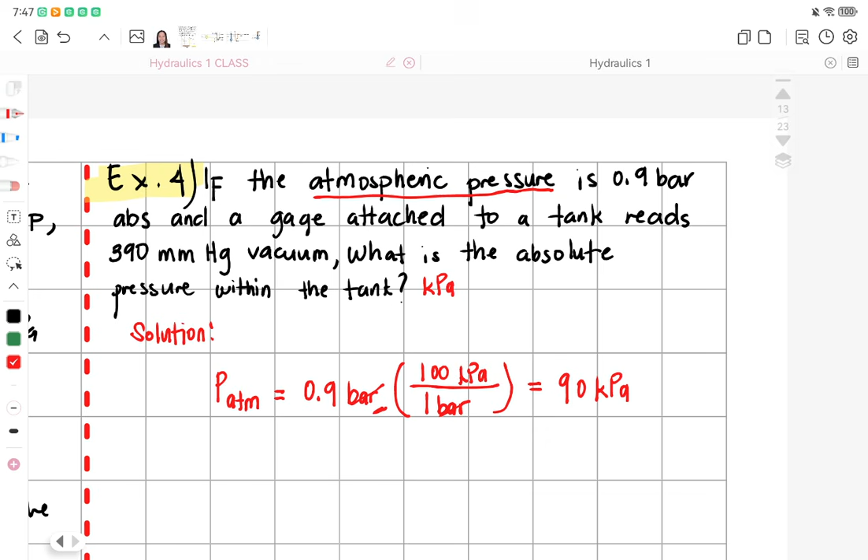What is being asked here is the absolute pressure, and we know that the formula for our absolute pressure is equal to our P gauge plus the P atmospheric.

So now we have P atmospheric equal to 90 kPa. What's left is to get our P gauge. For our P gauge, based on the problem, the gauge attached reads 390 mm height of mercury, and it is vacuum, vacuum pressure.

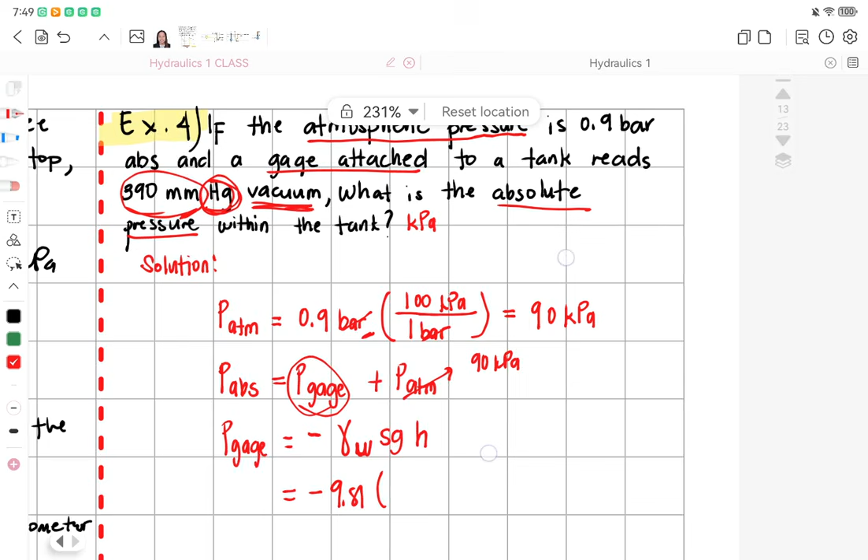So if we say vacuum pressure, our P gauge should be negative, right? Negative. And we know that the formula for P gauge is unit weight of liquid times the SG times the height, so 9.81, and we know that the unit weight of mercury has SG of 13.6.

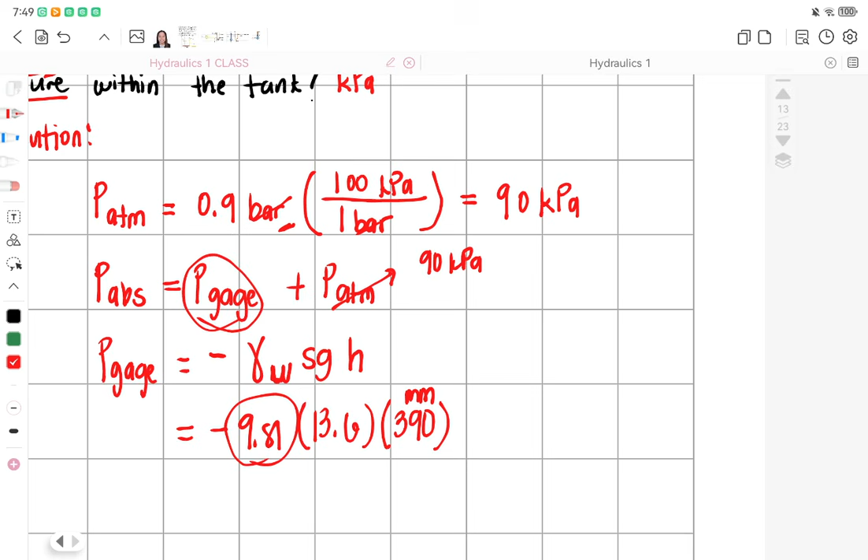So 13.6, and then given the height of the mercury which is 390 mm. Since this is in mm and this is in meters, and our kPa is kilonewton per m squared, we have to convert mm to meters. To convert that, we have 1000 mm is equal to 1 meter.

So now, what is our P gauge? We have negative 52.032 kPa for our P gauge. Since what is stated here is vacuum, we have a negative P gauge.

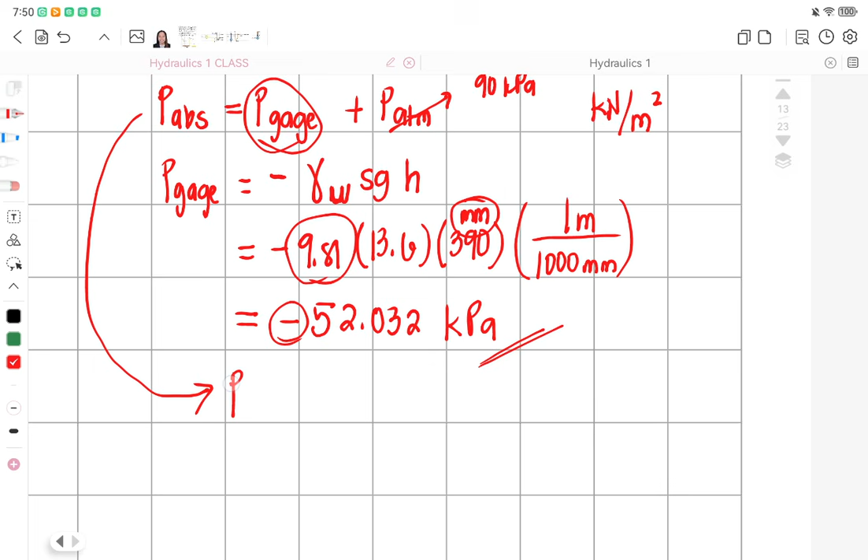Now we have to substitute all the values to get our absolute pressure. So P gauge negative 52.032 plus 90. If the P gauge is negative, you have to carry the sign. So therefore our P absolute is equal to 37.968 kPa. So this is our final answer.

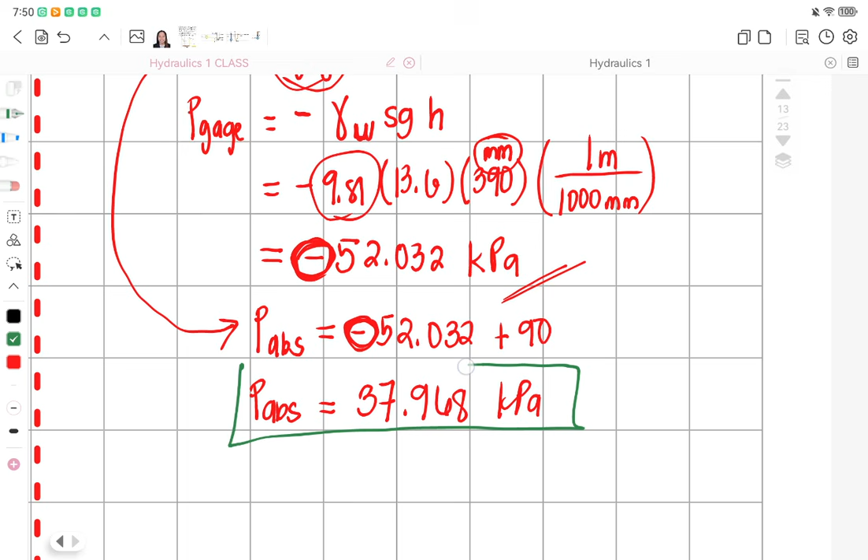Okay, now let's proceed to our problem number 2. For the setup shown, calculate the absolute pressure at A. Assume that the standard atmospheric pressure is 101.3.

So it is stated that the P atmospheric is 101.3, so we will be using this value. For our solution, what is being asked is the P absolute at A, which is equal to P gauge plus P atmospheric, and our atmospheric is 101.3 kPa. So what's left is to solve for the P gauge.

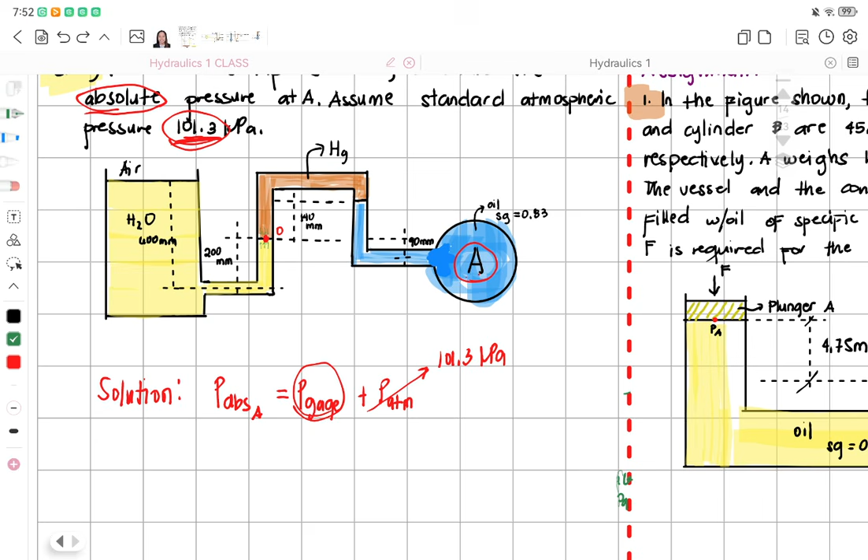If we want to get the P gauge, we can start either at this part, the earlier part, or this part here. Let's try starting at this part here. So if we start here, we have P gauge at A, or let's just say PA.

If we say gauge pressure, that means the pressure inside the container or the tube. Then the atmospheric is the pressure outside the container or the tube. So to make it easier to understand, let's start here. So we have PA, and we will not be considering this distance since it is horizontal.

So we only consider the vertical, this 90 mm. Since it goes up, we have minus 9.81 times the SG 0.83 times the height 0.09.

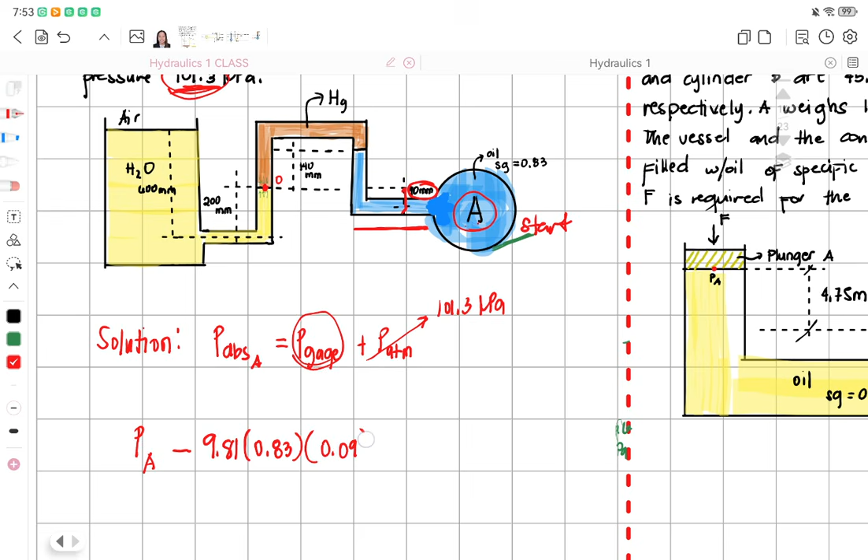So let's convert this to meters since it's in meters. So it goes up, so next is this one, still minus because it goes up, times the same liquid 0.83, times the height 0.14, since it's 140.

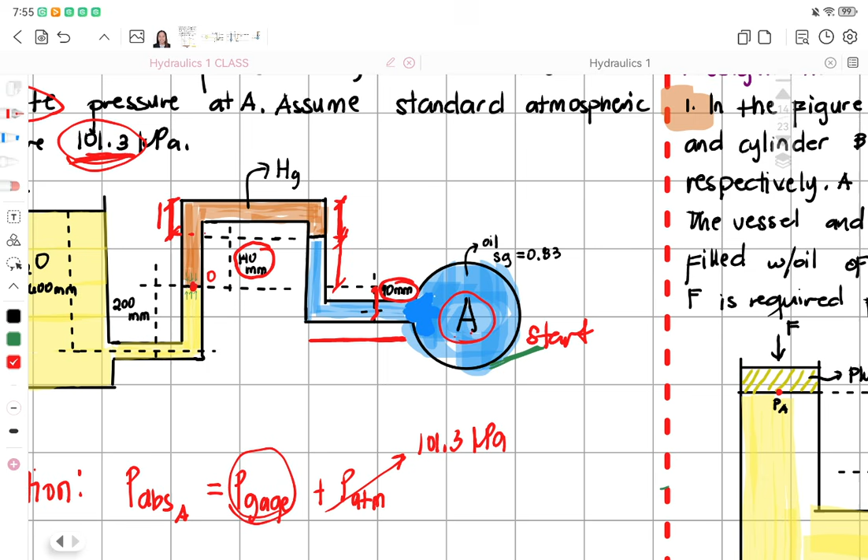Next, since this part is vertical going up, and we know this part is also vertical going down — and of course, the same elevation with the same liquid is equal to the same pressure. Since it goes up, it's minus, then it goes down so it's plus the same pressure, so they cancel out. So we don't need to apply this part and this part to the solution, and we also don't consider the horizontal part. So we go directly to this part.

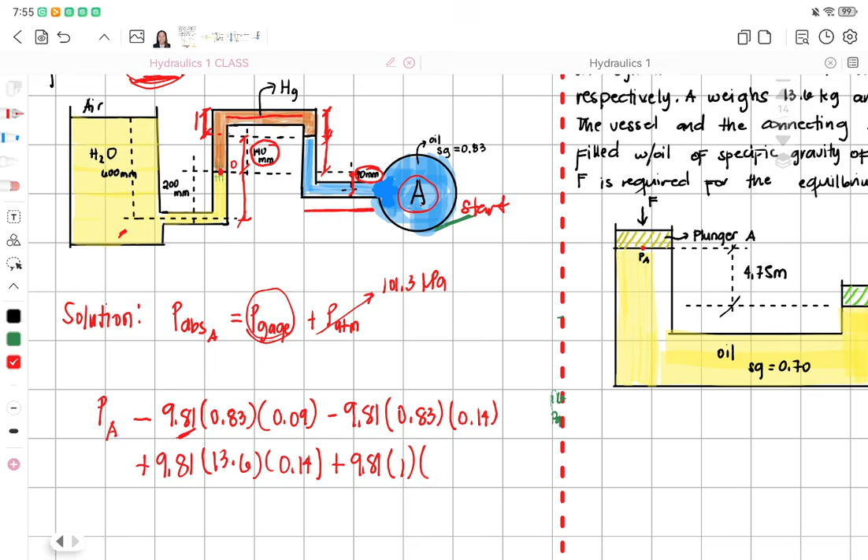Since it goes down, we have plus 9.81 times Hg, so 13.6 times the height, 0.14. Next, this part, plus 9.81 times 1, kay water naman, times the height, 0.2. Plus, ay minus na, kay gapasaka naman ta, minus 9.81 times 1 times 0.6 is equal to, unsa maning last?

This is open, then air, so 0. So this is our equation if we start here. If we calculate this one, your answer is negative 12.88 kPa.

Okay, sige, let's calculate if this is correct. You should try, ha? So yes, that is negative 12.88 kPa.

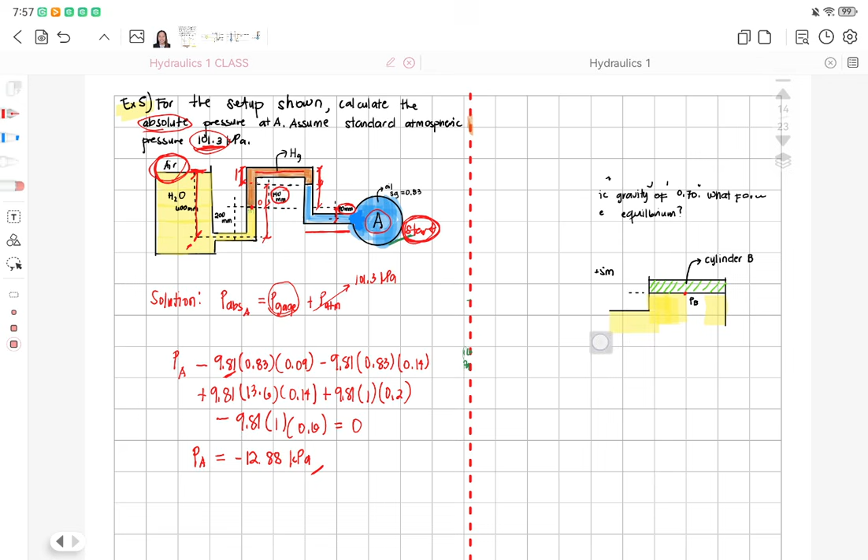Okay, try yan. Try ta dire, start class ha, dire this part. So we have 0 and then plus 9.81, kaniha 9.81 times 1 times 0.6, minus kanya pong 200, 9.81 times 1 times 0.2, next minus 9.81 times 13.6 times 0.14.

So dili na ni, ayon, di na nga ito na-consider. So kani plus 9.81 times 0.83 times its height, 0.14. And then plus 9.81 times 0.83 times 0.09. Kung unsa gani ang last class, i-equate ninyo. So is equal to our pressure A, P gauge A. So we have PA. Now let's compute.

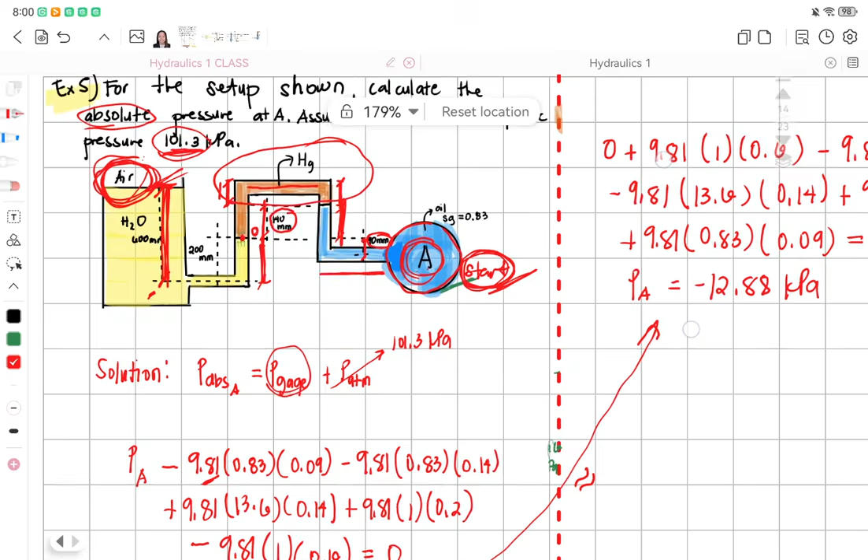Nakuha? So what if ang question is you have to get the pressure at O. Okay, let's later na lang. So ang gipangita diay kay ang absolute, no? Absolute pressure. So let's first answer that question.

So we have P absolute is equal to P gauge A plus P ATM. So P abs is equal to negative 12.88 plus 101.3. So P absolute is equal to 88.42 kPa. So this is our final answer for that question. Okay, you may take a screenshot.

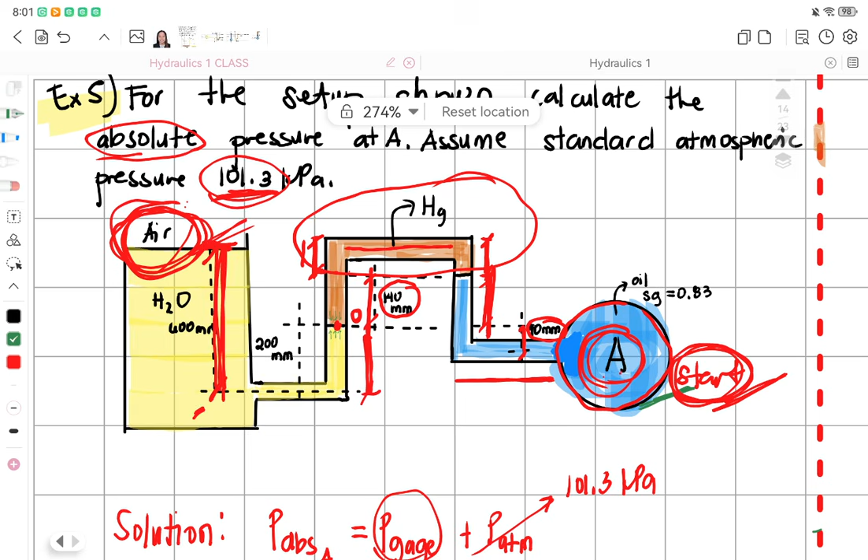Okay, now follow-up question. What if class? Ang ato ang question diri kay magkuha ta og pressure at O diri, na pressure. Boundary between our Hg and our H2O, kani this part. So unsa man nga mga pressure ang maka-affect ani at this part dire.

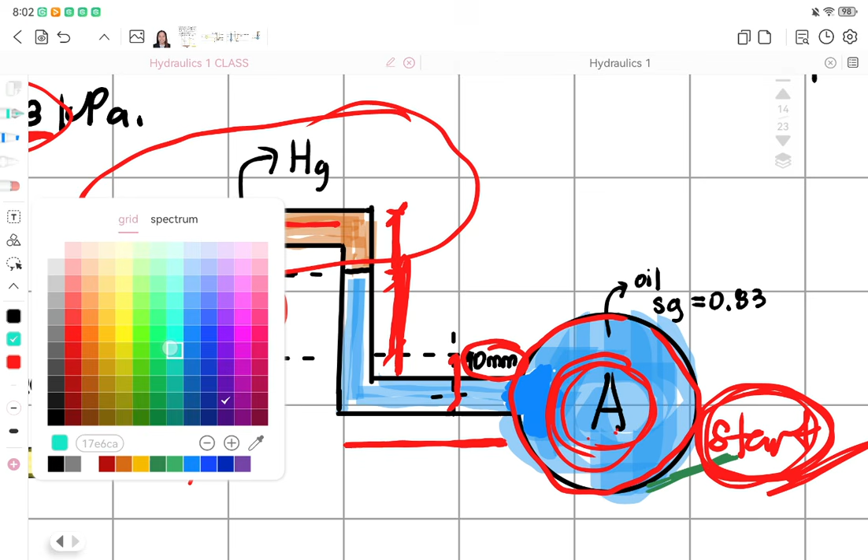So ang maka-affect ana is kani na mga part. So kani muna siya usa sa mo affect ani ato ang pressure at O and this part kani. Okay? So kung unsa ang pressure nga makuha ani na part, kanin diri na part ug pressure nga makuha nimo ani diri na part, it should be equal. Okay, let's try. Atong tryan.

Go naman ni kayo. Okay, let's try. Pressure at O ha. Ano ni? Let's try kay murag gugaw na siya. Copy.

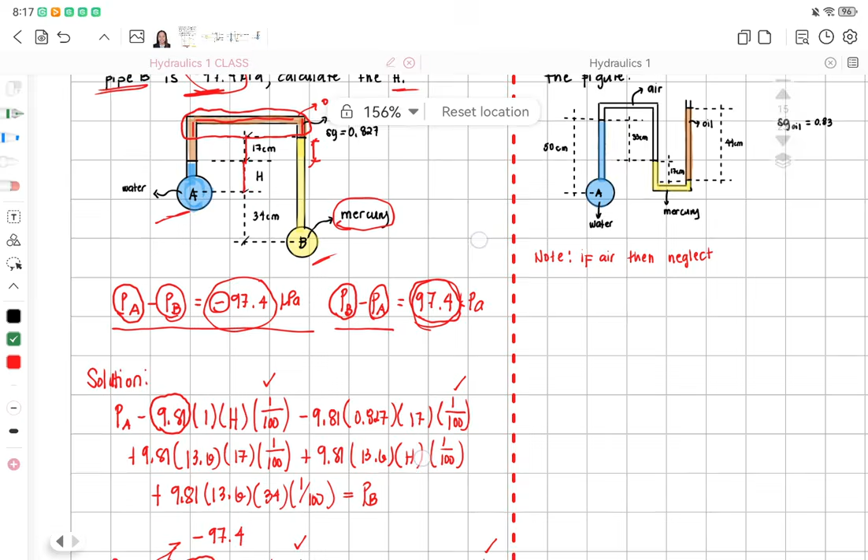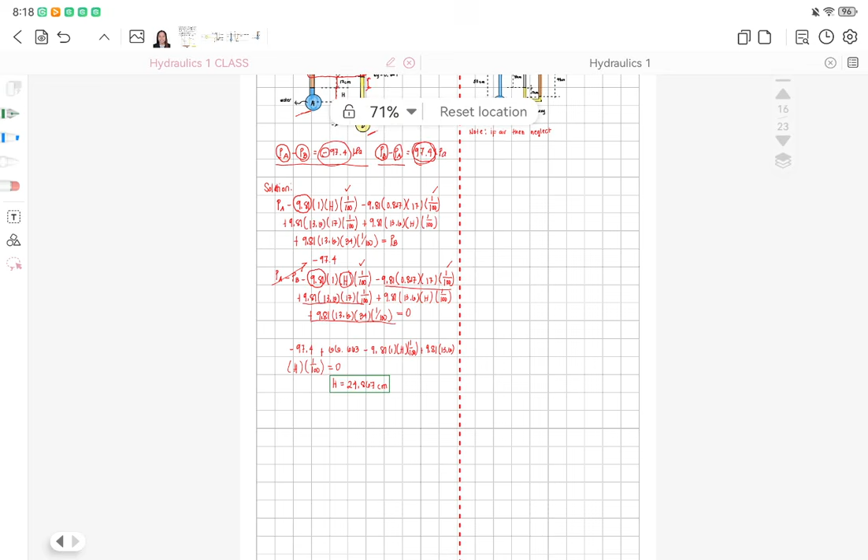Now let's proceed to our problem number 4. Okay, problem number 4. Okay, let's erase this. So this is your assignment. Later na. Okay. Sige, let's proceed.

Okay, determine the gauge pressure at point A in the figure. So gauge pressure A. So for our solution, so note, ang air na to is neglected. Neglected ng air inside our tube. So pwede ko mo gikan dire, gikan lang ko dire, pwede po mo gikan dire. Pero dire ako ha, stick lang ko sa akong solution. So inyo na ng part, if ganahan mo i-check ninyo, then you have to check it yourself.

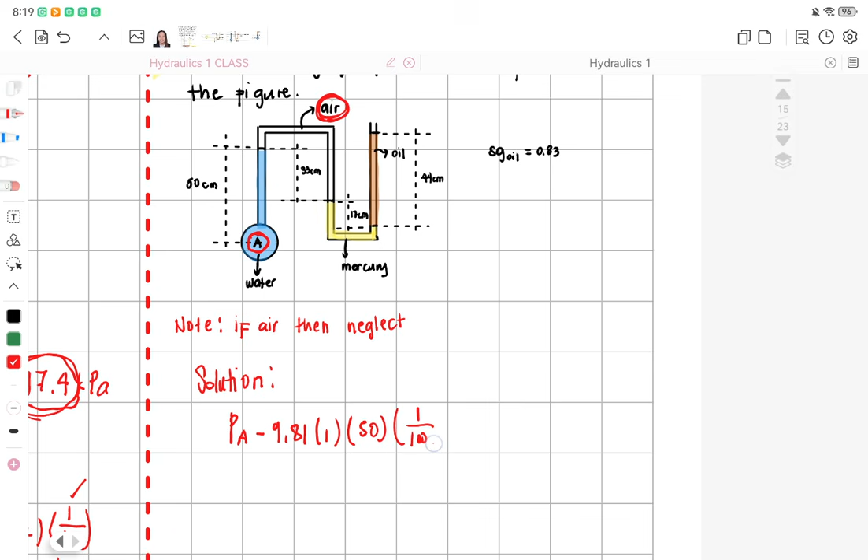So, solution. PA, pasaka siya, minus 9.81, that is water times 1 times the height, 50 centimeter. Convert to meter, so in 100 centimeter we have 1 meter. Sunod, so neglected ta ang air.

So direkta ta diri sa tong mercury. Plus na kay paubos naman ta, 13.6 times 17 centimeter times 1 over 100. So this solution, kaning 1 over 100 kay para ma-convert ang centimeter to meters.

So kaning diri na part, dili na to ni siya i-consider. It is because kaning vertical na to dire pa down and this vertical is positive, then minus, so 0 ra gyapon kay same pressure, same elevation, and same liquid. So direkta na ta sa oil, this part.

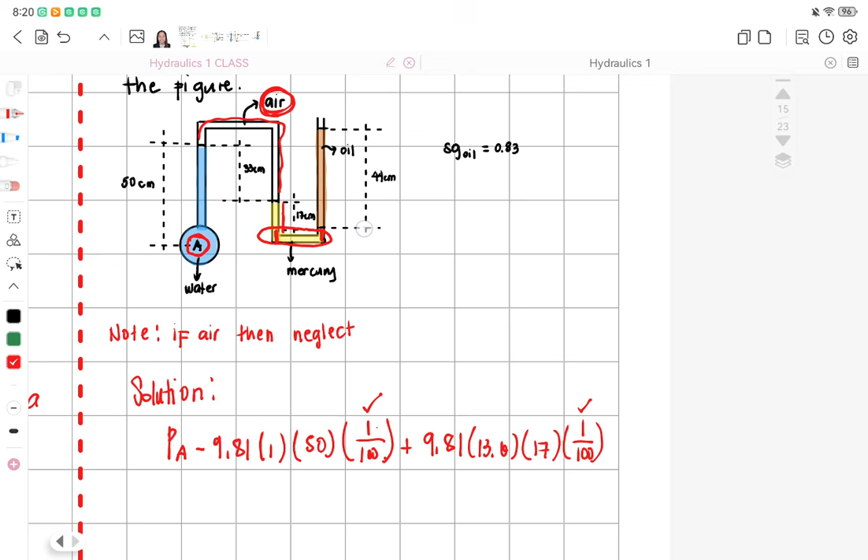So if pasaka, we have minus 9.81 times 0.83 times 44 times 1 over 100 is equal to, open, so 0. So PA is equal to, itong makuhaan na is negative 14.193 kPa. So this is our final answer.

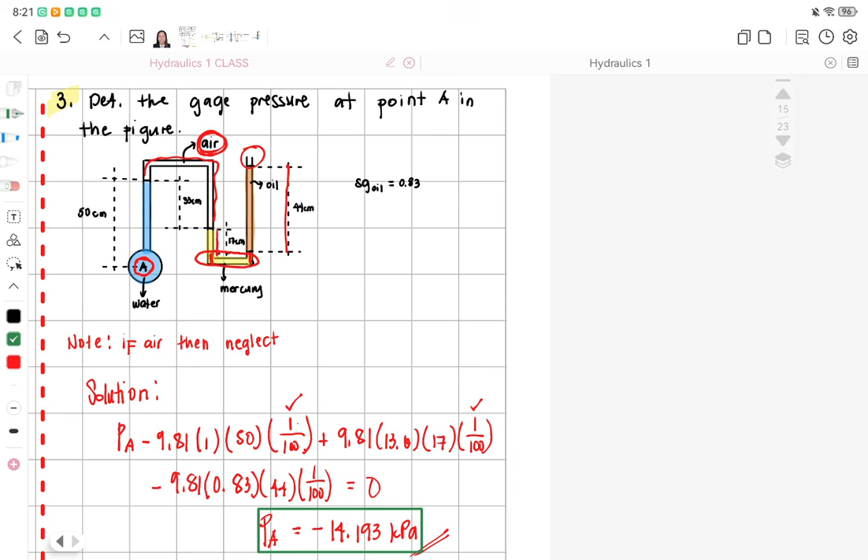So for the last part, or last assignment, sa atong problem sa atong sheet work, for gauge pressure at A of negative 10.89, find the specific gravity of the gauge liquid B. So kani.

Okay, so sa akong solution, diri ko gasugod. Pwede pod mo diri magsugod, pero diri kanira ako. So since this is elevation 3.2 class, therefore our datum here for our elevation 0 is naa diri, dapita. Pwede diri, bisag asa. Ha? Kamo rin magbuot.

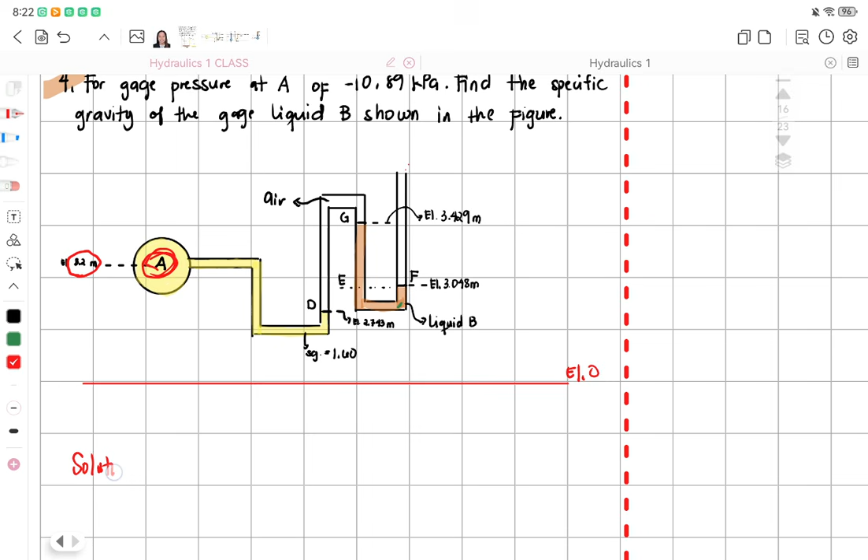Sige, susugdan na to. Solution. So PA, horizontal, not considered. Vertical, pila maning vertical na to, nata dire. So if this is 3.2, and this is 2.743, so therefore ang ato ang height diha is kani SG 1.6, manang na 1.6. Our height diha is 3.2 minus 2.743 for this height kani.

And then neglected ang air, so i-neglect na ni nato. So kani na ni ma-appeal. Ha? Same elevation, same liquid, so same pressure. Plus minus, so 0 ra gyapon. So direkta ta dire, kani.

So pa down, so we have plus 9.81 times iyang SG times the height. So pila may height ani? If this is 3.429 dire, and dire ang 3, so minus 3.048. To is equal to 0. So that's it, 0 kay open man.

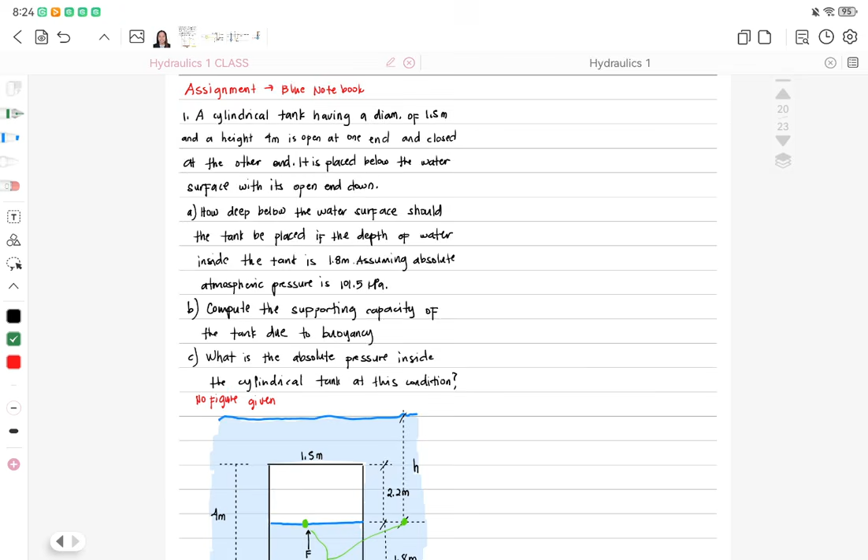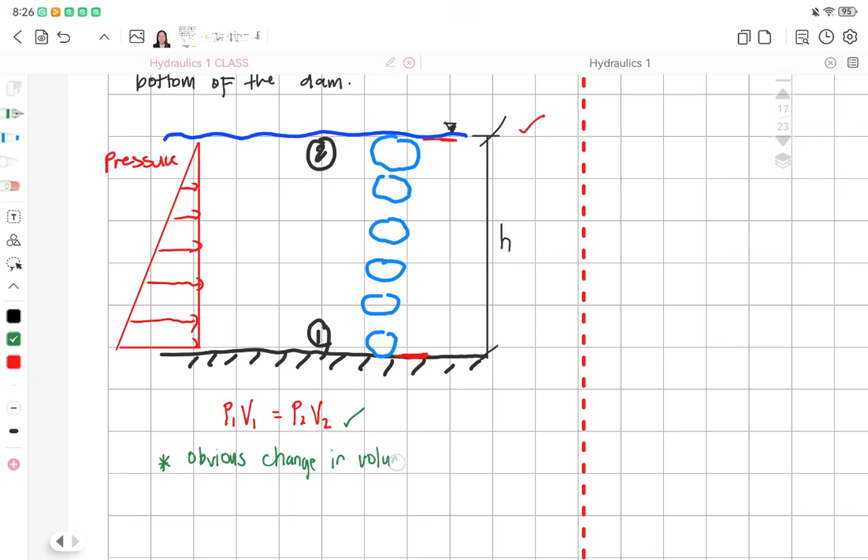Okay, so in this problem class, we will be using the formula nga na-discuss nato, P1V1 is equal to P2V2. Okay, so kanus-a man ta makagamit ani na formula? So you have to take note that if there is an obvious change in volume of the gas, we can use this formula.

Kuha. Pwede pod, as you can see, nga change in volume and change in elevation. Kuha ninyo? So inyo yung unahong lantaw, if naganit change volume sa ato ang gas, sa atong problem, direct na nga makaingon mo nga we can directly use this formula, P1V1 is equal to P2V2. Okay? Sige.

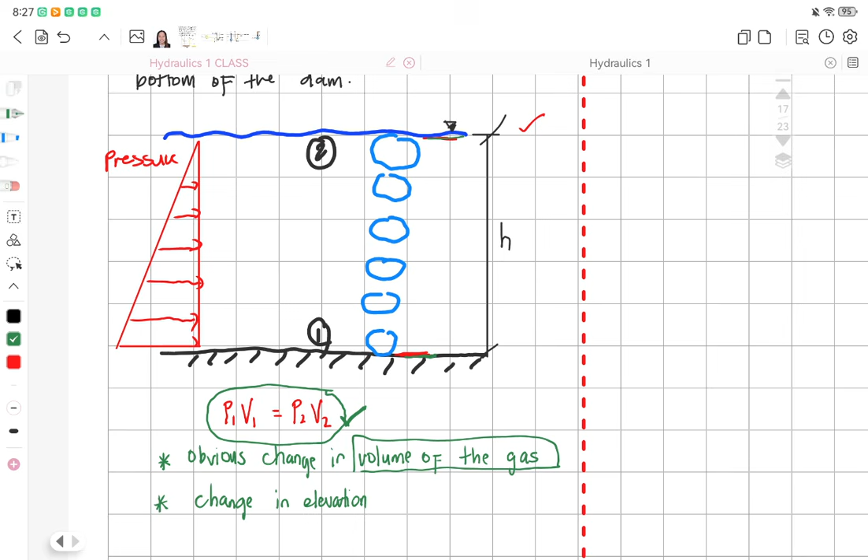Makita man nato sa drawing, di ba? Ningon pud siya diri nga ang volume daw sa atong bubble upon reaching the water surface is 3 times than it is at the bottom. Okay, it is because, diba, according to Boyle's law, the water pressure, look at the water pressure diagram, triangular. The water pressure is high at the bottom.

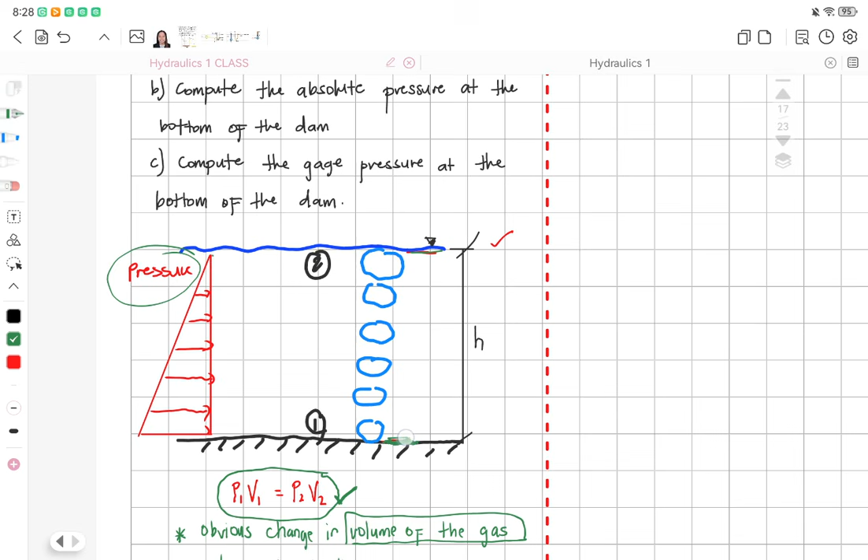It is because of the weight of water above. So sa may height ani ang sa may weight nga gidala aning pressure at the bottom, kani siya tanan. So this compresses the bubble, munang mas gamay ang volume sa atong bubble compare sa volume sa bubble upon reaching the water surface. Kuha? Okay, so muna siya ang Boyle's law. Okay.

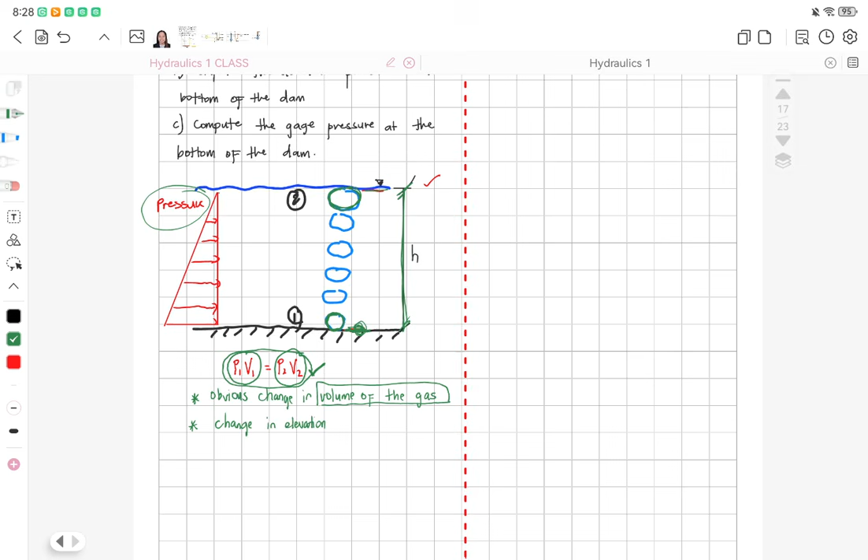Let's try solving this problem. We know, class, nga ang atong P1V1 is muna siya ang atuang initial pressure and initial volume. And atuang P2V2, this is our final pressure and volume. Okay, let's first solve the values sa atong before or initial P1 and V1. Okay.

When we say P1, unsa gani ang P1 ato sa na siya nga pressure? Is it absolute or gauge? Okay, so ang P1 nga gipasabot sa formula is absolute. So therefore our P absolute is equal to P gauge plus P atmospheric. So this one is constant, 101.325 kPa.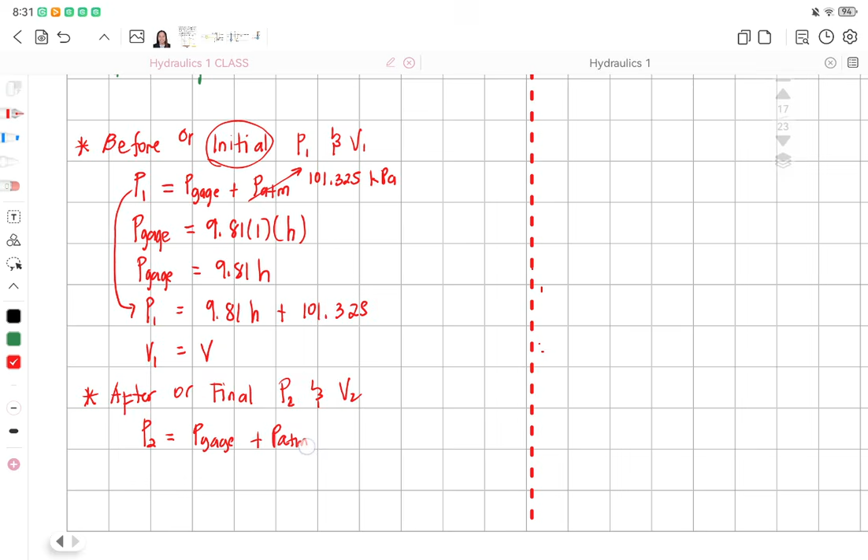101.325. So our volume, let's equate it to variable V. Now let's have the final P1, P2 and V2. So we know P2 is equal to P gauge plus P atmospheric. So let's consider our P2 as the bubble at the surface.

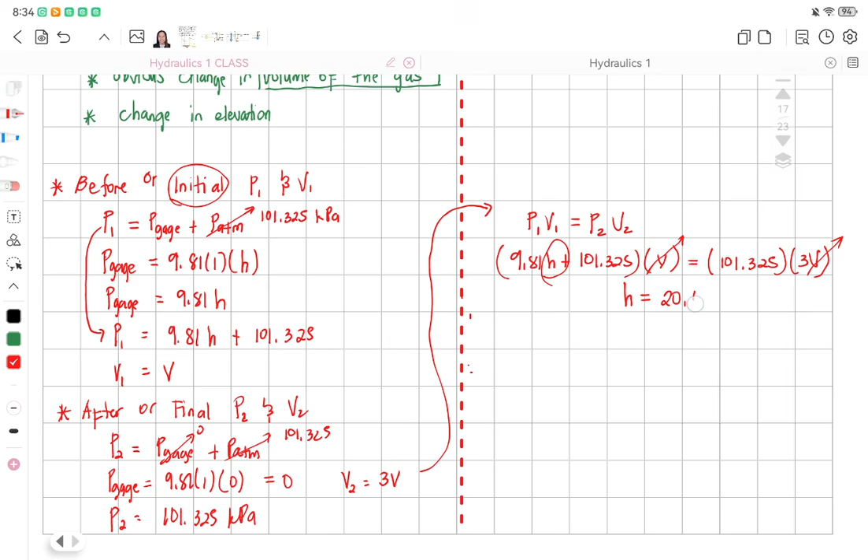20.657 meters, so that is the answer for question A. You may take a screenshot here.

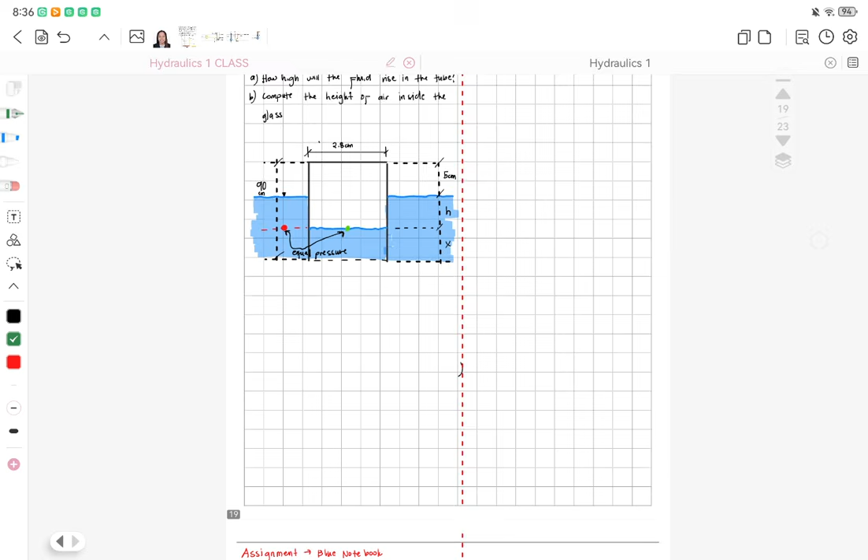Okay, let's proceed to our second example. This will be our last example, and the rest will be your assignment.

A cylindrical glass tubing 28.6 millimeters inside diameter and 915 mm long with one end closed is immersed vertically with the open end down into a tank of cleaning solvent with specific gravity of 0.73, until only 50 mm of its length remains above the liquid surface. If the barometric pressure is 98.6 kPa and neglecting vapor pressure, how high will the fluid rise in the tube? So the question is, how high will the fluid rise inside this tube?

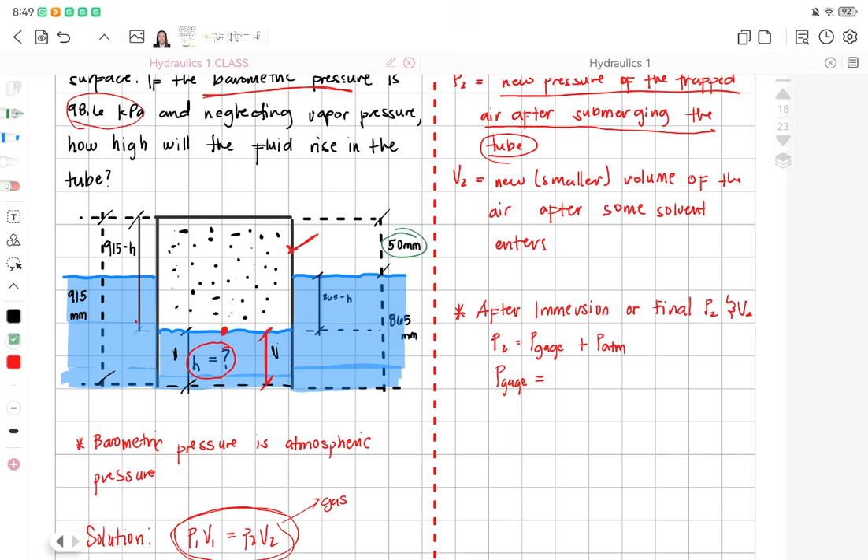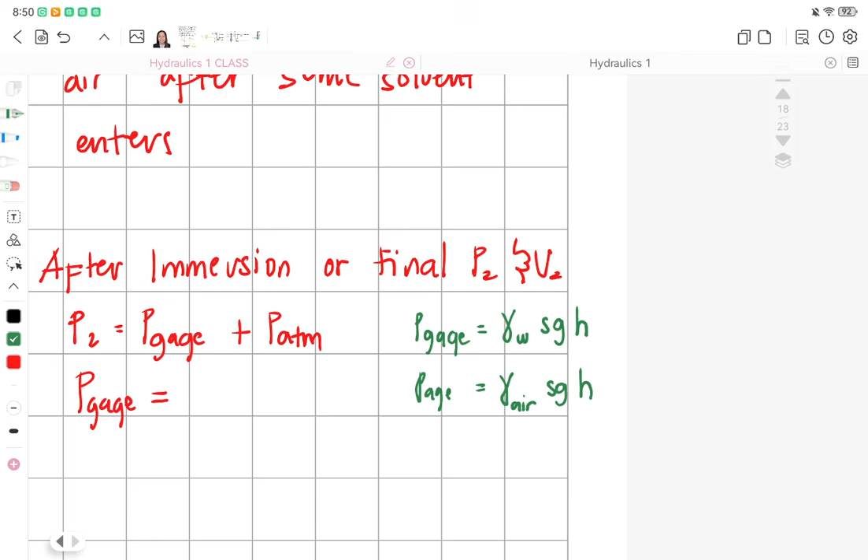When we say gauge pressure class, say the formula is unit weight of water times SG times the height. But since what we're considering now as the gauge is the air, gauge pressure is equal to unit weight of air times the SG times the height of the gas. Gas na gyud ang atong gi-consider ani. Basta maggamit ang formula nga P1V1 is equal to P2V2, everything nga atong gi-consider ana is gas or air. Kuha? Okay.

So pwede na to siya makuha using this formula: unit weight of air times SG times height. Di ba nihatag man ko ninyo og unit weight of air in terms of kilograms? Ila man to unit weight sa air. Sige, pangitaon ninyo: 1.225 kilogram per m cube times SG times height. Since this is kilogram, in order for us to convert that to kilonewton, i-times una og 9.81 para maimo siyang newton, and then we have to divide it by 1,000 para maimo siyang kilonewton.

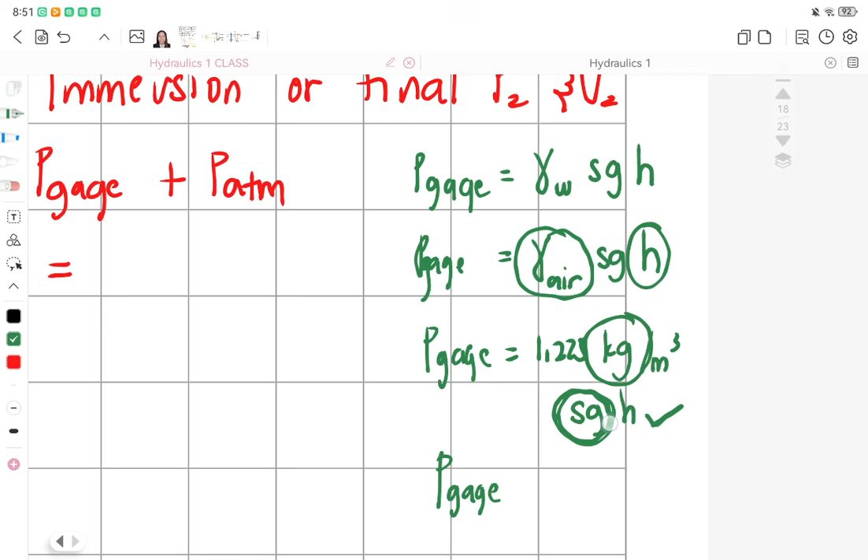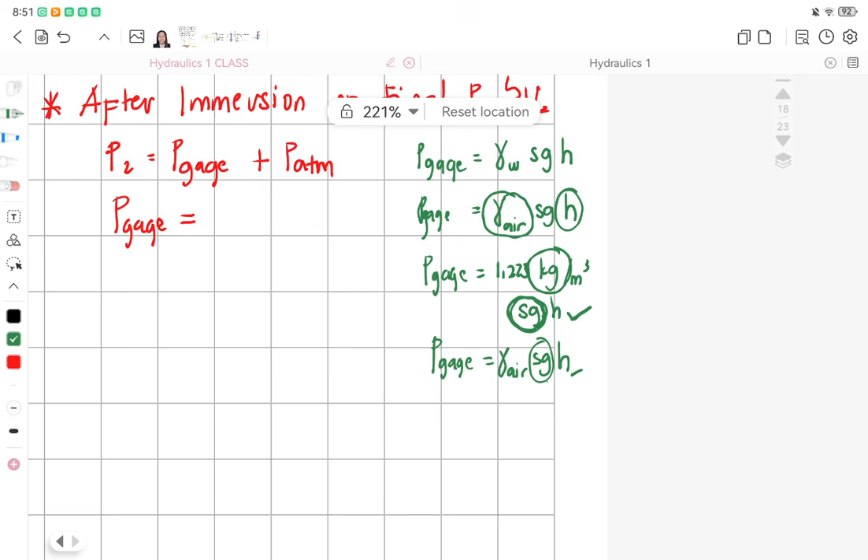Pero kung kani atong gamiton na formula class in terms of air or gas, wala man tay SG. Diba? Unless given tag SG. Pwede ta ka gamit ani na formula, kaning unit weight sa air times SG times height. Wala man tay SG. Natay height, pwede ta makakuha sa height, pero ang SG, di man given. So saan man na? Sige, saan man na, if dili given ang SG? So dili ta kagamit sa unit weight of air times the SG times the height for our P gauge.

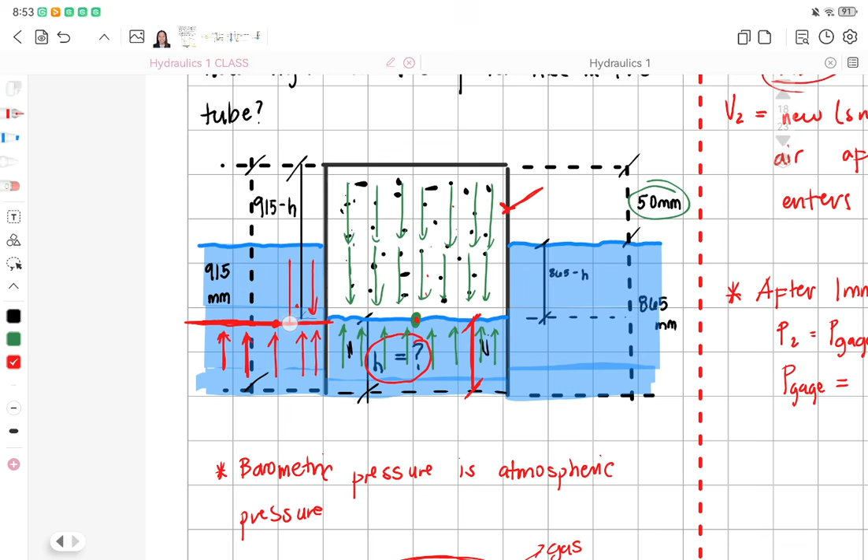Instead, we know that according to Pascal: same liquid, same elevation is equal to same pressure. So ang pressure nga ga-exert at this part, muna siya ang pressure sa atong air nga nag-exert at this part, kani green nga circle dere, equal pud siya sa pressure nga gi-exert aning tubig, kaning naa dere. Diba? Kuha ninyo? So if equal na siya, pwede ta mo gamit in terms of liquid or fluid. So saan man na nato? We know that if same elevation class, same liquid, we have the same pressure. So pwede ta kani atong gamiton dire, kay at the same elevation, the same liquid, same pressure. So kung unsay gi-exert na pressure at this point, same pressure po na siya nga gi-exert ani niya.

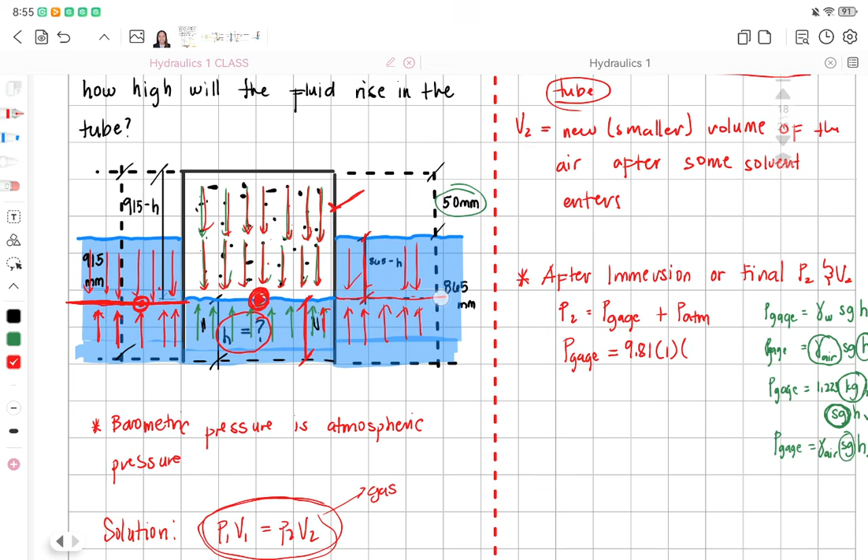Oha, so pwede na to gamiton para makuha ning pressure nato dire kaning siya diring dapita. So natay 9.81 times the unit weight of water times iyahang height. Kaya itong gikuha na pressure, kaniman, kanina pressure, kani dire. Di man takakuha ani nga pressure kay wala man tay SG sa tong air. So para di ta maglibog, pwede na ito gamiton tong ingon ni Pascal nga same elevation, same liquid, same pressure. Kay ang atoang pressure sa tubig nag-exert man na siya normal sa surface. So mo-una siya, equal po ni siya. So at this part, na i-exert dire, na po dire. So kanina lang na part ato ang kuhaan og pressure. Okay. So kung unsa ni siya nga pressure nga atong makuha dire, equal po na siya sa pressure dire. So kung unsay pressure nato dire, equal po siya dire. So kung unsay pressure nato ani diring dapita, mo pud iyang pressure dire. Kuha ninyo? Sige.

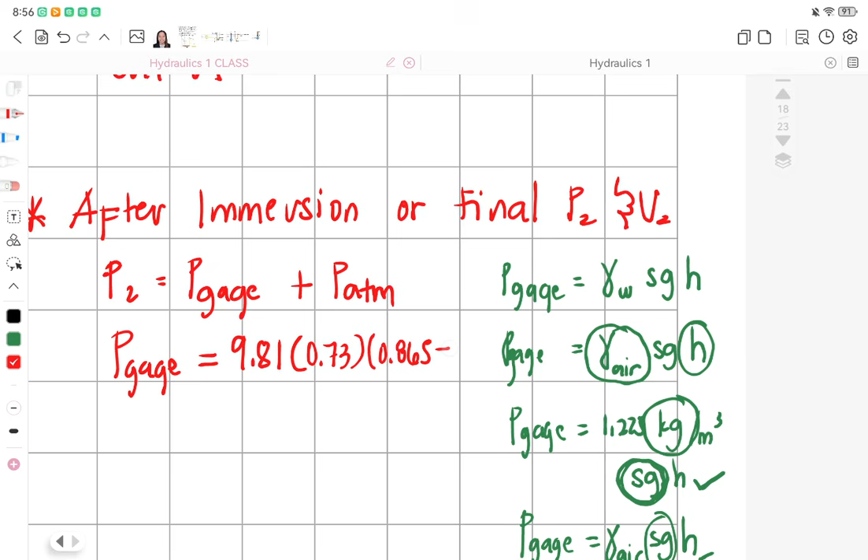So we have, let's consider this height kani. Pila man na? Natay 0.865 minus h. Ay wait, ang SG din nato ani class is 0.73. So this is 0.73 times 0.865 minus h. So mao na siya itong P gauge. Okay? Sige. And this is 98.6. So P2 now is equal to 9.81 times 0.73 times 0.865 minus h plus 98.6. So mao na siya ato ang P2.

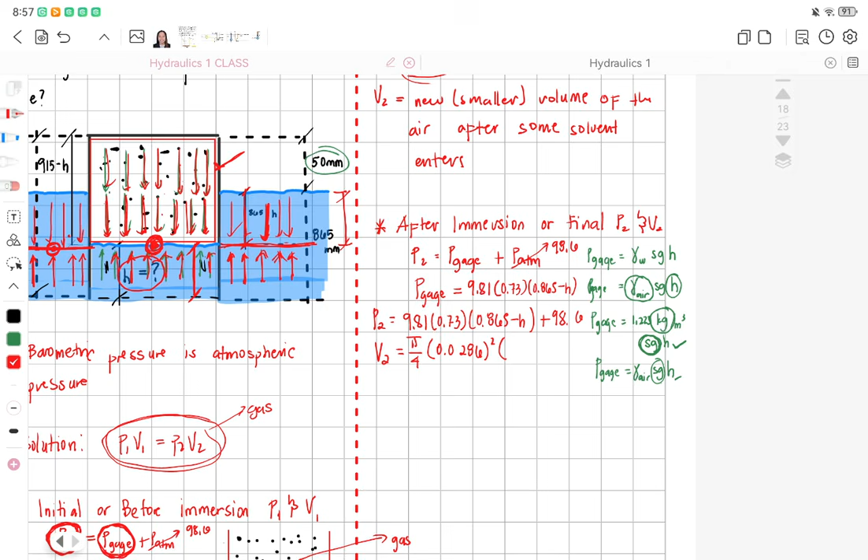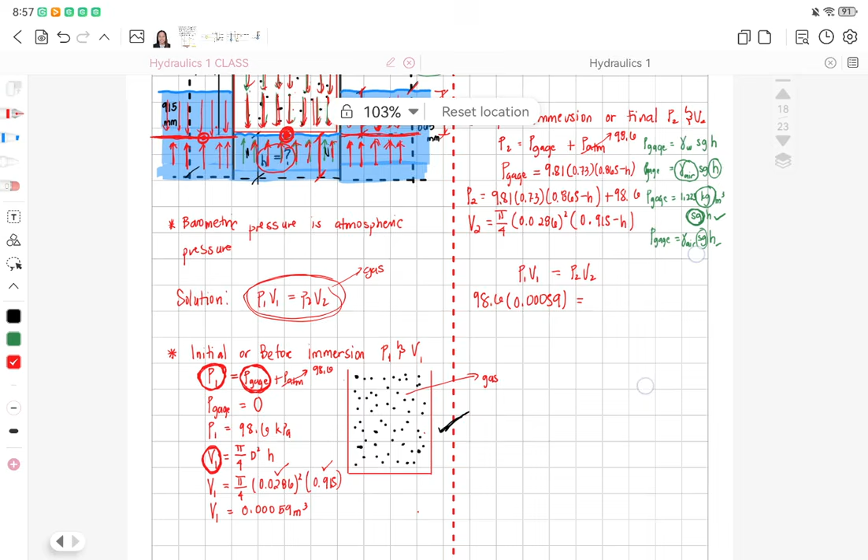Now for our volume 2, so volume sa gas, unsa may volume ani niya, kanila, this part lang, kay mao lang niya itong ang gas. So we have pi over 4 times our diameter raised to 2. So may height ani niya. If this is 50, this whole is 915, and this is h. So naa na lang tayo 0.915 minus h. Okay, so mao na siya ang atoang V2. Now let's substitute everything. P1V1 is equal to P2V2. Okay? So pila tong P1 kanina? 98.6 times V1, 0.00059. P2 na to is 9.81 times 0.73 times 0.865 minus h plus 98.6. So that is our P2, times V2, pi over 4, 0.0286 squared, times 0.915 minus h. Okay, so shift solve, we can now get the value of h, which is 0.048 meters. So i-check ninyo niha.

Okay, ito na i-check. Ato i-calculate balik.

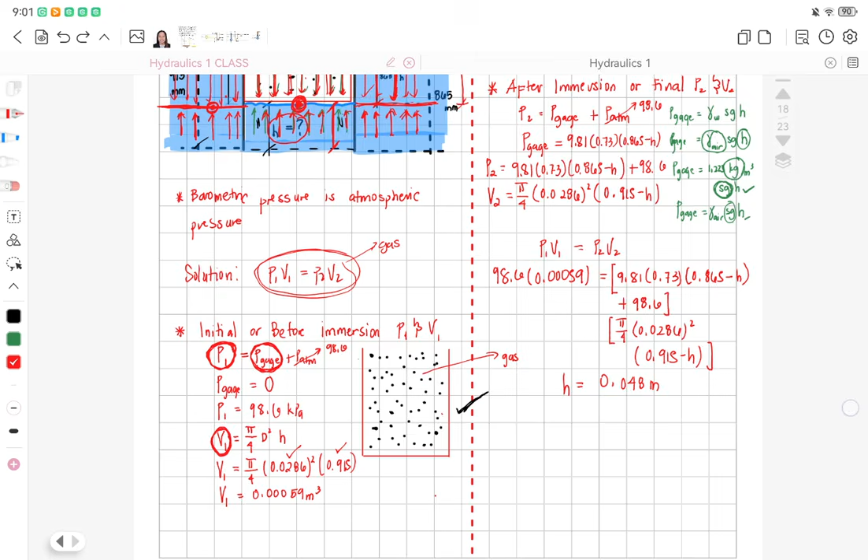Sakto naman, ito yung sipiat dali. 59 plus 98.6.

Ngayon sa klasa. Wait. Let me review my answers.